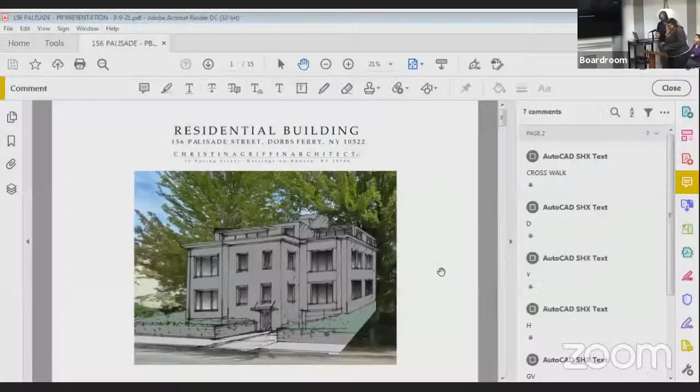I'm not able to share... let's see... you're welcome. Magic.

Good evening. Hi, I'm Christina Griffin. Can everyone hear me? Yes. Okay.

We submitted a new proposal. We've reduced the number of units to 4. This is a building that is 3-story, about 8,300 square feet. After our last meeting, we looked carefully at zoning regulations, and we have an as-built, as-of-right scheme to show you. We also have some schemes we want to go over with you because there are just some difficult situations that come up because of the grade that make it necessary for us to ask you to consider options that are just slightly different than the requirements.

We know we're following the new MDR2 zoning regulations that were recently adopted. This is a very quick sketch, and I'll say it's quick because we're still searching for the right solution for the building. It's just an image to show the 3-story building, access down below, and the 3rd floor setback. We'll go back to that in a minute.

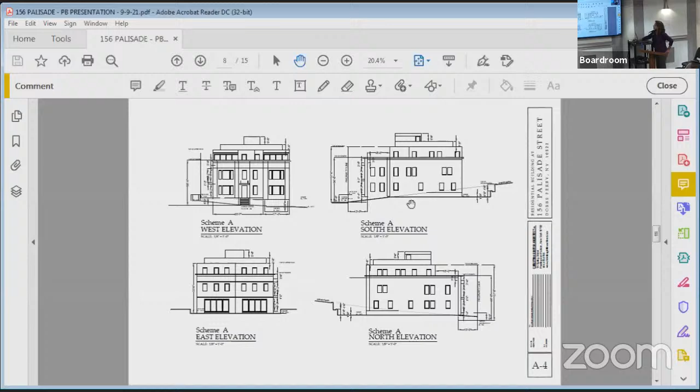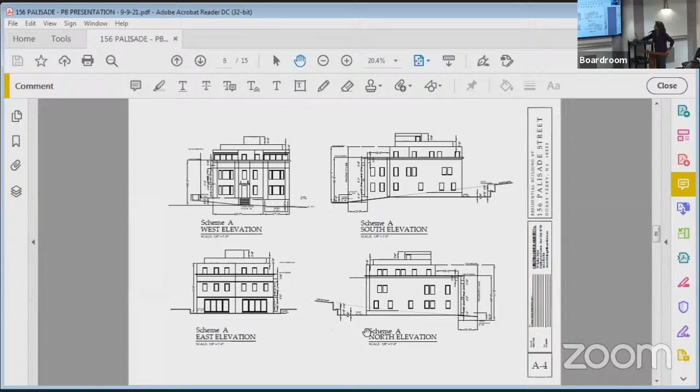And these are our elevations. Again, we're showing a very simple design right now. The west elevation has roof decks, outdoor space on top at the 3rd floor. The east elevation shows glass doors on the 1st floor, allowing access to backyards for those units. If you can see the dashed line on the north-south elevation, there's a part of the building tucked under the grade, and we'll have to wrap the back with a double retaining wall around the sides to get clearance for those windows.

Now we'd like to ask the board to consider a Scheme B. The reason is this is a very steep site - it goes up 15 feet. From the center line of the site at the sidewalk, the elevation is 109, and at the center line in the back of the property, it's 124, so there's a difference of 15 feet. We felt it was important to consider another plan where we wouldn't have so much excavation, which we know is not just expensive but causes a lot of disruption.

So Scheme B has a garage with 1 parking space per unit. Instead of 7, we have 4, so that we can keep the back wall of that garage aligned with the building above.

We know there's a parking lot across the street, so we're thinking that residents could use parking there to make up the difference for what they need.

This scheme also has the advantage that the driveway into the building won't be as steep. We had a 12% slope, but this is a much gentler slope. We also get handicap accessibility at this lower level. This section for Scheme B shows the dashed line of the grade, and the retaining wall is only 4.5 feet high.

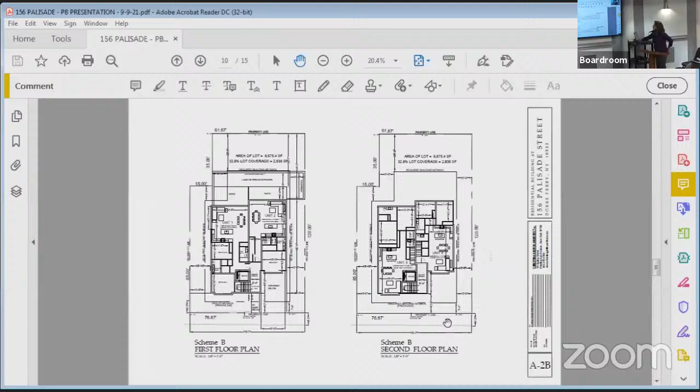So we wanted to ask the board if they would consider Scheme B. That 37-foot maximum height from the zoning regulation is measured from the center line of the sidewalk in front of the building, but because of the steep slope of this particular site, we feel it really has a negative impact on the building when you have to fit it into a steep grade like this.

So this scheme is actually 39.8 feet. It happens to be that number because that allows us the handicap access down below. That height is at the very top of the building, at the third floor, which is set back 15 feet from the front wall of the building. It actually jogs, so it varies—I'll show you that plan.

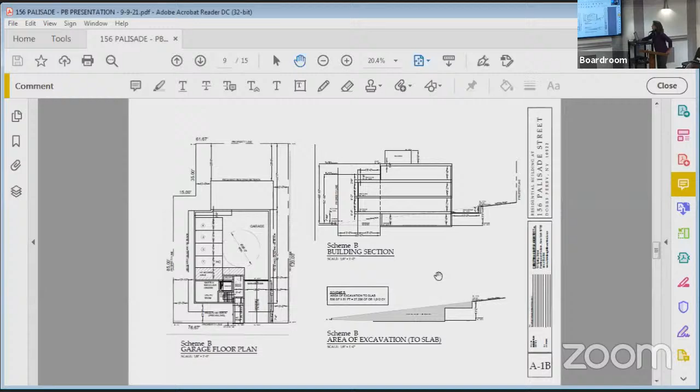Scheme B is exactly the same as Scheme A, really, except now we have handicap access to the lower basement level. We have the same layout, same lot coverage—it's just that the garage has only 4 units and 4 spaces.

Up at the third floor, the height of each of the floors goes up to that 39.8.

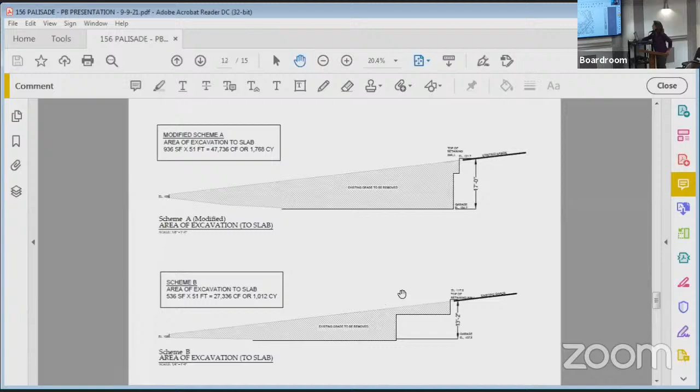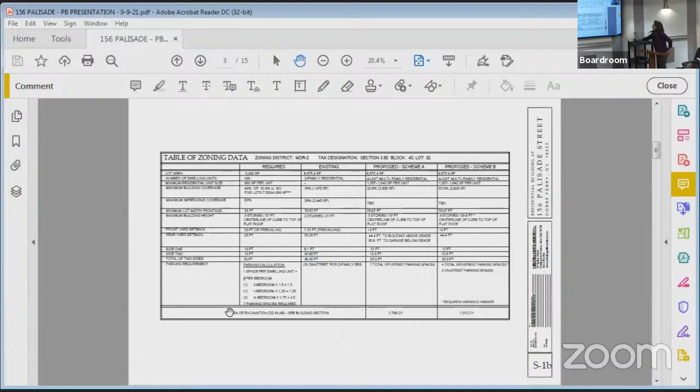Back to our 3D sketch—again, very rough, needs to be developed. This represents Scheme B, and that's all we have prepared for tonight. I did this in SketchUp, then added a hand-drawn overlay, so the SketchUp model is set so that the top of this third floor setback is 39.8, and the top of this wall in the front is 32.8.

Scheme A is lower than this. We have this at the front parapet at 30 feet and the back very top at 37 feet. So in most respects, the building meets the code except for the height on scheme B.

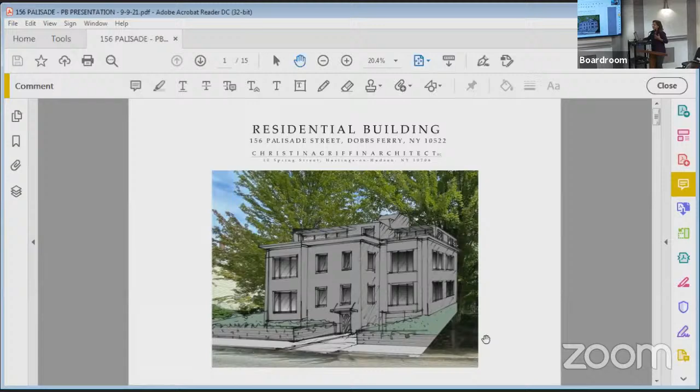So we would like to know your comments on both these schemes.

Christina, do you have the underlying discussion? The submission, the elevation, the street elevation is scheme A. Is there, have you tried putting the scheme B elevation into the overall streetscape? Not yet, because of vacations and everything, and the time between meetings, we couldn't get there. We would like to do that.

We might want to draw this in a different way because the main facade is 15 feet beyond the wall of the garage, and the third floor wouldn't be so strong. But we will need to put this on the streetscape so you can see that, and we're going to be doing that depending on your comments tonight.

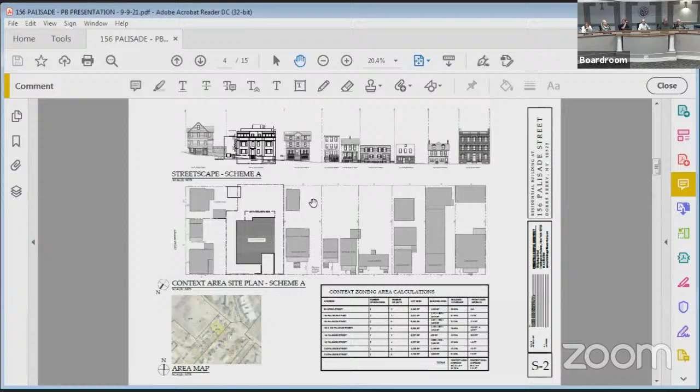In scheme B, you could theoretically bring in, in terms of the front setback, there's the requirement, and then there's this other thing you can do, which is average the other setbacks along there. In scheme A, you have to make room for the handicap ramp. In scheme B, to reduce some excavation, you could theoretically pull the building forward a little bit. We know that, and we just haven't had the time, and we'd like to see if we can do that as well to help reduce the excavation in the back.

I think this is a nice step forward, and we appreciate your hearing what the board has been saying and trying to get the building to fit more comfortably into the streetscape.

I agree, I really appreciate that you have a scheme that is compliant. After 20 meetings, it's probably wonderful, and I think it makes us look much more favorably on little tweaks that'll help out.

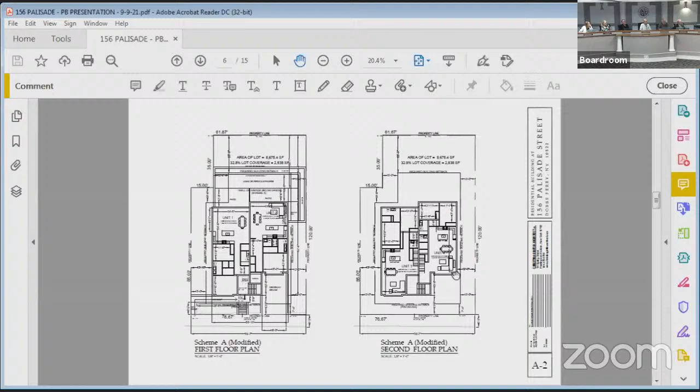Well, I think scheme B will not be compliant. Right, scheme A is compliant. Correct, scheme A is compliant. I mean, I think it's important. My first reaction, I was only looking at scheme A. My first reaction was, okay, we're there in terms of the overall direction of this thing, finally.

But I guess the board has to discuss scheme A versus scheme B in terms of the implications for parking, height of the building, and the excavation. So who wants to? It would require waivers for the parking, the height. Is that right, from A? If you go to B, there are two waivers that you're looking for.

For B, yes. I also want to point out, in Hastings, we had a maximum height for all buildings that went from the lowest point to the highest point, and we have so many buildings that look like they're submerged and they've had flooding problems. Finally, that code was changed, probably 10 years ago, but I've been in Hastings a long time. So sometimes when you have a steep slope and a maximum height at the lowest end, it forces you to push the building into the ground.

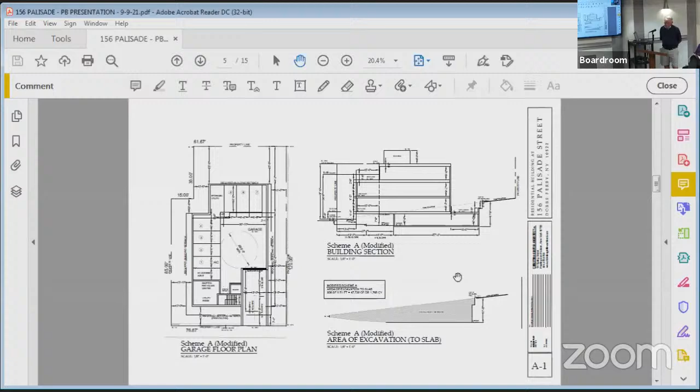Yeah, yeah, right? I feel like that's something that ought to be manageable, huh? Upstairs has that. No, yeah, I thought- thank you. I got it. Yeah, when I walked, at the beginning of this process, when I walked down Palisade and was just talking to people, they just were saying parking, parking, parking.

Understand. Anyone else? So I guess the village needs to build a parking lot there. Wow, right. Another parking lot - that's empty, good. I'm sure.

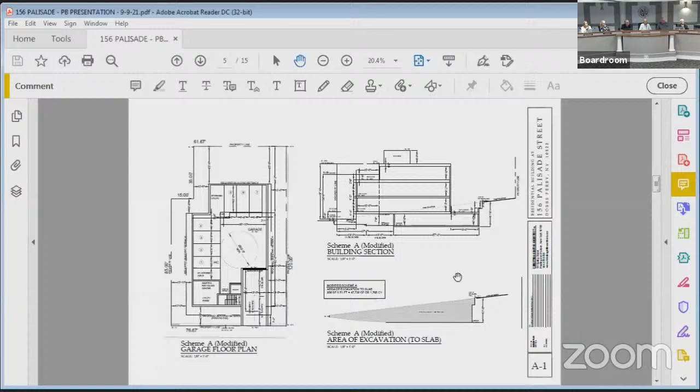If there's no other comments from the board, and the board is interested in going forward with scheme B, then I might suggest that the applicant provide more detailed engineering drawings, stormwater erosion sediment control, full site plans, and elevations for their next submission. Okay, so we're in lockstep on scheme B, we're proceeding. Any other questions from the board? Comments? Good. Well, thank you. Are you going to adjourn this to a date certain, or are you going to?

Are you going to adjourn the hearing tonight, or are you going to just take it off the agenda and have them resubmit and start from scratch? If you want to give them time, would you be able to make the submission deadline for the next meeting, or are you looking to be further down the road? Because if you can get an adjournment tonight, you won't have to renotice or start from scratch.

So what about an adjournment till the November meeting? The public hearing is adjourned till November. The public hearing remains open, and you'll get an engineer on board. So the public hearing would be adjourned to the November meeting. Yes, as long as you adjourn to a date certain, then you're fine. They wouldn't have to renotice if you adjourn it tonight. Can you give the date of the November meeting?

The November meeting would be November 4th, the first Thursday. It's up to the applicant. Yeah, it's up to the applicant if they want to destroy the lives of their consultants or not.

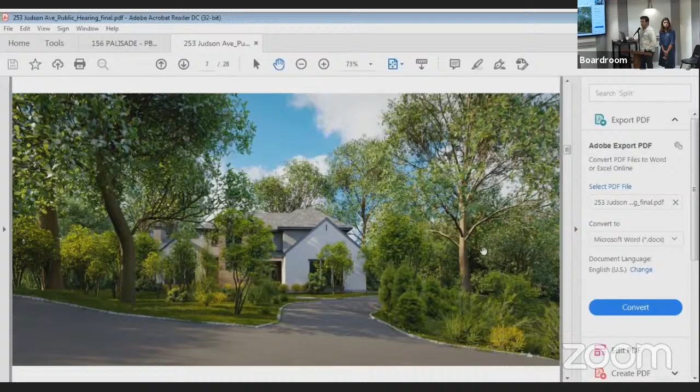We have the basement plan, the architectural elevations, front, rear, and both sides. We have the floor plan, that's the first floor plan with a 2-car garage. We have the media room, the studio, the courtyard, and the living room, dining room, kitchen and breakfast room, along with the mud room and powder room, which is adjacent to the garage.

The next one would be the second floor plan, which doesn't occupy as much space as the first floor plan because there's roof areas and different architectural elements which break up the facade, giving it more aesthetic appeal. We have a laundry room, shared bathroom, and then 3 bedrooms with an office. One of those, the rear one, would be the master bedroom with the master bath.

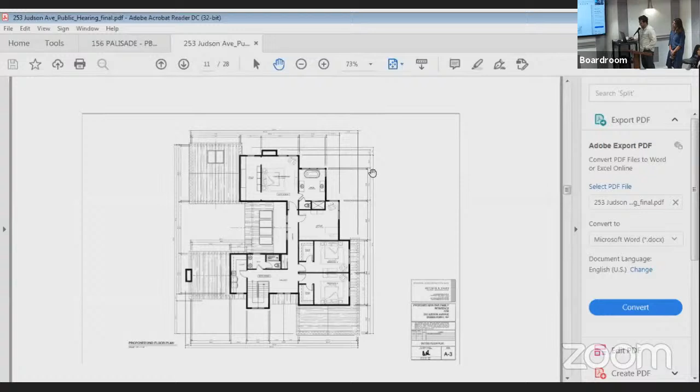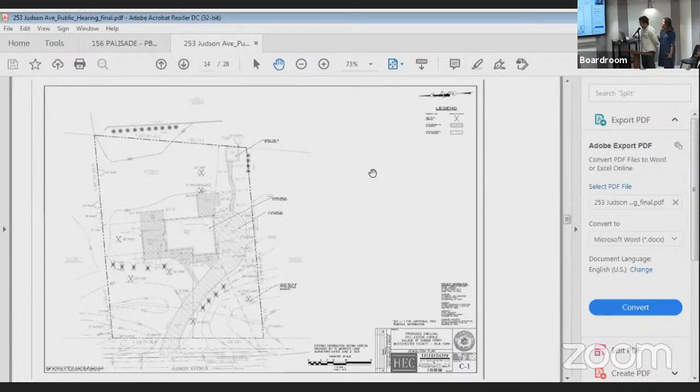So more or less, it's a pretty straightforward site plan. As far as engineering, all the comments from Mr. Oliveri were addressed. All the stormwater for the site is stored on site for up to the 100-year storm from all impervious areas. There's a small section of the driveway where it goes right out to the road - it's just due to elevations, it wasn't feasible to collect. But for the most part, everything is collected on site, stored on site, and will not be released. In the existing conditions, all the paved areas and the house were released to grade and added to the drainage problems of the village.

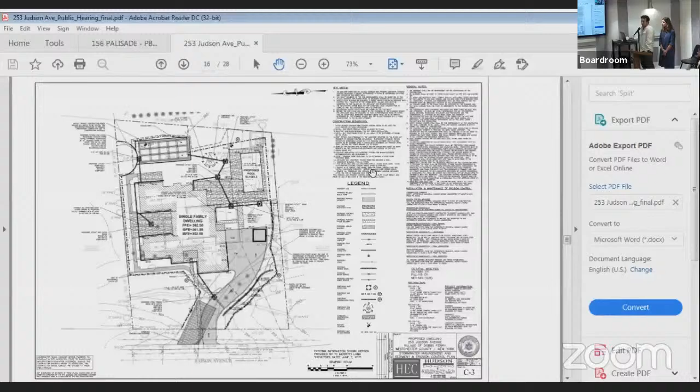Hi, I'm Susan Janesville of Aspect 120 Landscape Architecture. Talking through the landscape design, we really stuck to the area of disturbance and looked to replace a lot of the landscaping that would be taken away because of the disturbance, using all, if not exclusively native, then almost all native and non-invasive and appropriate for the climate. Also putting 2 large oak trees in the back of the house, recognizing that canopy trees are important, and putting them where it will not endanger the house in the long term, but will give shade to the site.

Yeah, there's a lot we could talk about in terms of landscape on the existing site. It's really, as Shamita just said, a lushly planted site - you could see the care that was given to the planting of the site's landscape. But that said, as you might know, the landscaping from the past 30 years isn't the same as the last 5 or 10 years. A lot of invasive species were planted, and only things that survived the deer remain. So there's a lot of improvement that can be done beyond what's being done right now, and that is definitely the next step. As I spoke to Michael and Shmita, they really do want to move forward and do really smart landscaping with native species, looking at things appropriate for the climate, deer tolerant as much as possible. Of course, nothing is deer proof, but looking forward, there's a lot that's going to be done beyond this. Thanks.

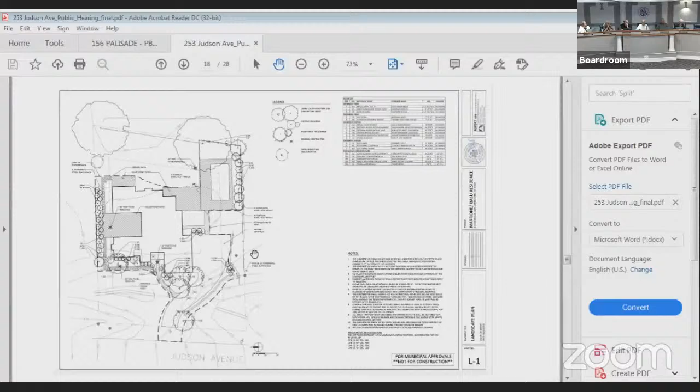Okay, thank you. If they have to chip, we could require that company to do a survey of the surrounding properties, existing conditions of their foundations, and then a closeout survey of conditions after it's completed. Okay, thank you. I imagine there'd be ways to work around the ledge too, incorporate it into the basement without destroying it.

Right, I'm just raising a concern. I know lots of people who have sort of integrated rock into their basement. As part of the building permit process too, construction sequencing and approvals for that kind of impact, construction impacts would all be taken into consideration. But as a resident of Judson Avenue, I can tell you we've had months of chipping going on in our neighborhood, so it's a valid concern.

Okay. Well, that's just that one, that's just the unfinished property at the corner. I mean, some of the other buildings have gone through the same process.

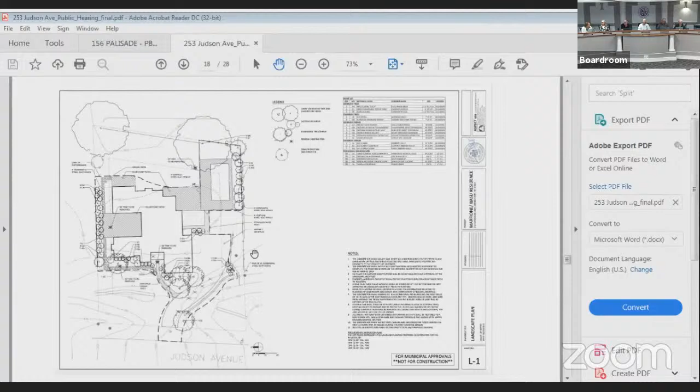And also, taking that into consideration and making it a condition that the impacts would need to be reviewed in terms of what kinds of vibrations and things would impact the nearby structures. And you've done that in the past. I know when 41 Cedar was here, you included particular conversations about the impact on the church. So there are ways to get around that, but you would benefit from providing instructions exactly what you need.

Next time, and then if there's no one else to speak, you can adjourn it to your October meeting. If they won't meet the submission deadline, you can take more comments and then adjourn it again. So you have that option. I think the key for us tonight is to plan a site visit.

I think we've heard from everybody, and I think it gets repetitive after a while, but I think it'd be very helpful. I think some of the people on the board live nearby. I've driven down there for years and know people that have lived on every side of you, so I know the area, but I think you look at it differently when you're looking at it for a purpose. Do we need to have an organized site meeting, or can we just go on our own? I think it might be helpful to go together if we could.

One thing I'd ask you to do, which we typically do, is have your surveyor stake out the major corners of the house on the property. You may find this a useful exercise for yourself, to stake out the major corners of the house and, based on the neighbor's comment, maybe where the pool is going to be sitting. That's usually helpful to actually visualize where the building is going to be.

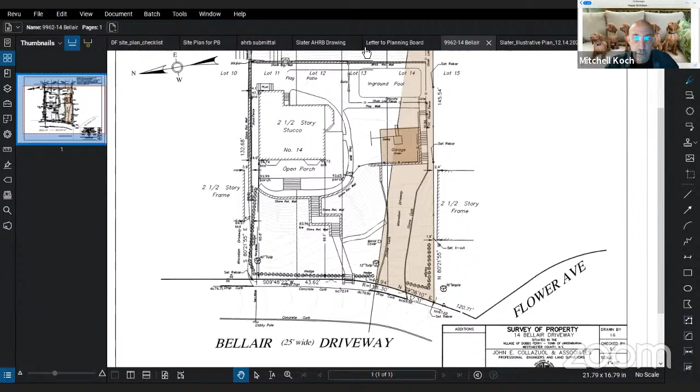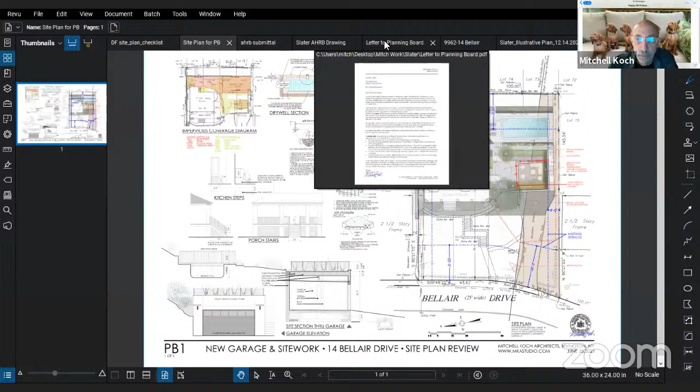And again, we don't have any impervious coverage issue—we're not adding to the impervious coverage, although what's already existing is somewhat in excess of what is allowed. So that's a concern, I think. And finally, we did go to the AHRB, who approved the project. And if Yair is still listening, he could pipe in if he wants to.

I could speak to this, Mr. Chairman, if you like. Sure. So as Mitch said, this was confusing because a portion of it is in Hastings. As he said, it's true, he's adding only 10 square feet of impervious surface. We require stormwater retention at additions of 100 square feet, but because the property coverage was already over—not so much in Dobbs as it is in Hastings, who doesn't want him to do anything—the applicant has graciously offered to voluntarily put in some stormwater retention, which I thought solved any confusion and was a good compromise.

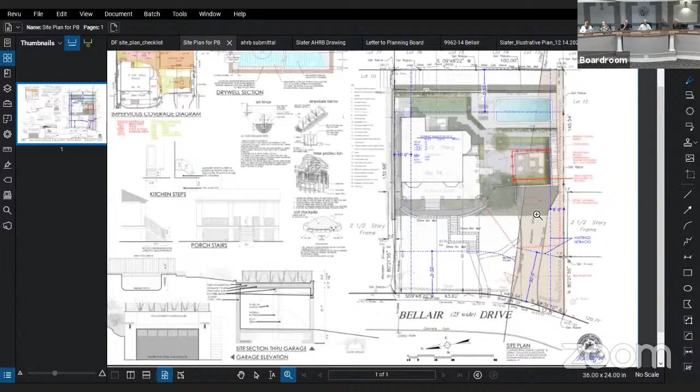Is the garage being replaced with a new structure? That's correct, same footprint basically. Well, this doesn't seem like it has a large impact. Master of understatement, Alan Hale. It'll be better because now they're retaining water.

So what's our next step, with the goal of streamlining this? Well, we can... ignore it, it'll go away. Could we set a public hearing for next month with a resolution ready to go? Yes, I think we do a public hearing and go. Both myself and Anthony submitted comments back on August 2nd to the applicant, and it would be helpful if the applicant would respond to those comments before the next meeting as well.

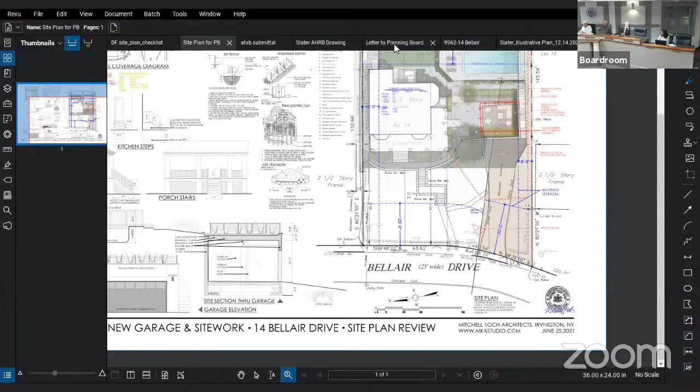Okay, yeah. On August 2nd, I responded on the 6th. I don't know if this covers it, but the zoning table I submitted—that actually... again, the weird thing about the impervious coverage is that most of it is not actually on the Dobbs Ferry side.

So I'm not really sure how to parse that, because these calculations are for the entire site, not just the portion of the site that's in Dobbs Ferry. But if you direct me to do that, I can work it out that way too. I'm just a little bit confused, honestly. I think there's both, and there's two memos, and I did not receive that memo. I'll follow up with the building department and take a look at it.

I believe if Ed is satisfied with what you submitted for the zoning table, that'll be fine. But there's really just a few other additional comments that need to be addressed. I'll make it my business to get on that right away if I haven't done it already.

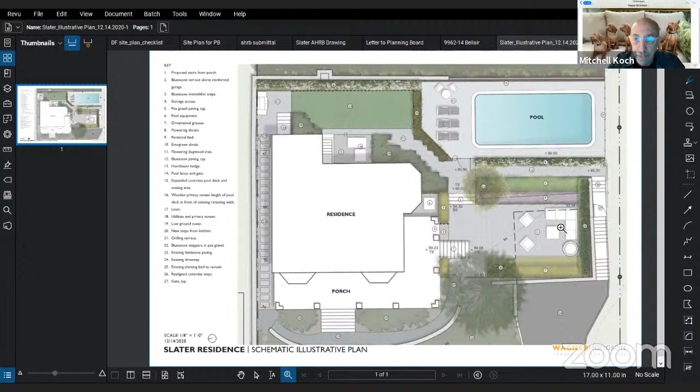Yes, I do have one final question with regard to the submittal for the public hearing. My clients have asked that this list of plantings that the landscape architect has provided be held in abeyance until the next phase of the project. You can see they've specified some specimen trees and some shrubbery, but at this time, the goal would be to just plant grasses and wait until they can get their heads, and their wallets, around a more extensive and comprehensive planting plan.

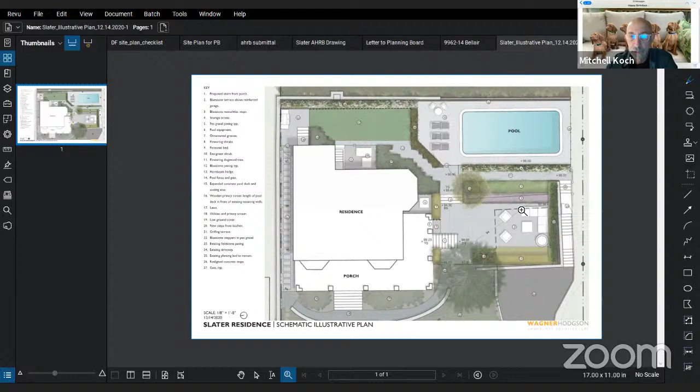So I don't know whether that's allowed, or if this has to be done in tandem with the actual construction work. Obviously we'll plant to mitigate runoff, but most of the plantings are like little flower beds. Can they just put in lawn and submit a simpler plan? I think the way forward is to submit a simpler landscape plan and we'll take a look at that.

Okay, let me see if I can pull that together, or get the landscape architect to do so by our submission deadline. That would be great. If in fact I cannot get that in time for the October hearing, can we be pushed back to the December hearing? Is there one every month? I think that may work. Yeah, okay, I think that's actually perfect. But I would like to see if I can get this happening right away.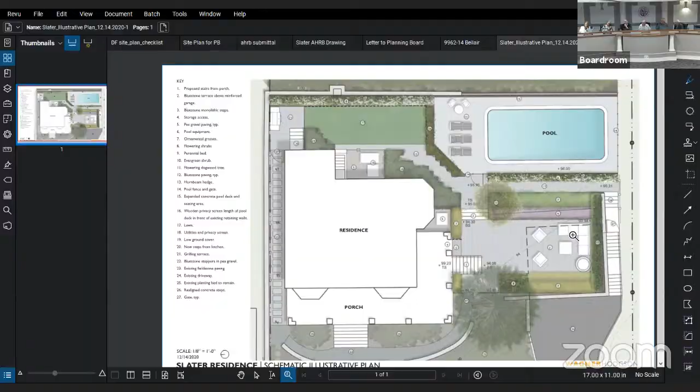Okay, so do we call for a public hearing? Is that our next step? Set a date, let's do it. And he would need to do the neighbor notifications. It's been done already. Oh, that's right, they do them initially. That's great.

I move we call for a public hearing. Second. All in favor? Aye. That would be at the, let me get it right, October 7th meeting date.

Okay, good, thank you. Good night, people. Good night. Good night, Rich, wake up those dogs, they look a little stiff.

All right, item number 9 on the agenda, 7 Fairlawn Avenue. Pre-submission conference for proposed exterior additions to existing home. I think that was the last thing on the agenda. No, and then we got a vacant lot.

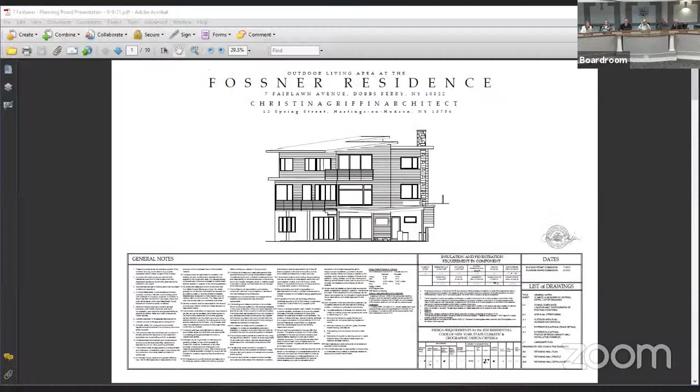We have a Zoomer. Christina and Suzanne are coming on from Christina Griffin Architects. Oh, she was just here. I think she knew the meeting was going to be long, so she decided to go. There she is. You look familiar. Hi, Christina. Hi, how are you? I'm back. Suzanne's here with me.

I'm the architect, she's the project architect, and we're going to take you through drawings for a new outdoor living area for 7 Fairlawn Avenue. Suzanne's going to put up the drawings. Can you see them? I thought I had them up. No? It's not showing. Oh, I'll try again, it was only showing partial. Yeah, perfect, there you go.

Okay, now we were the original architects for this house, and we were delighted to be asked to come back to design an outdoor space at the side of the house. The purpose is to give them a shaded area, which they don't have at the moment. There's a lot of intense heat back there, so to provide a shaded outdoor living space that consists of a porch that has under it a sitting area, an outdoor kitchen, and a dining area, a plunge pool, and a patio.

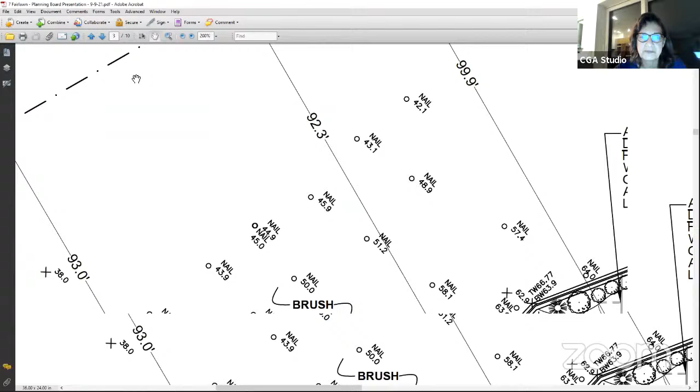We are also, most importantly, replacing a retaining wall. There's a series of retaining walls that have failed along the street, and we're going to put up a new retaining wall, but we're actually covering those retaining walls with a plant bed that will have erosion control plants, like different types of ground cover.

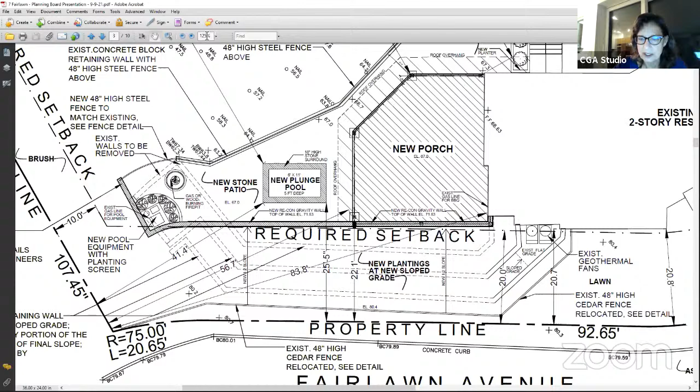Ground cover, juniper, will go on that slope grade. We're working very closely with an engineer, Alex from Sessi Engineering, who should be with us tonight, to make sure that the new retaining wall and any new structure is going to be structurally sound.

This new porch and patio has been designed so that the supports are within the limits of having structural members that will not have any negative impact on the existing retaining wall. If you can see my cursor here, this angular shape is a low retaining wall at the edge of this level area on the back of the house.

Between that retaining wall and our proposed retaining wall, we're planning to put a new porch and a new patio with a very small 8 by 11 foot plunge pool. If you know this site, the whole area from this angular shaped retaining wall down is all a steep slope area.

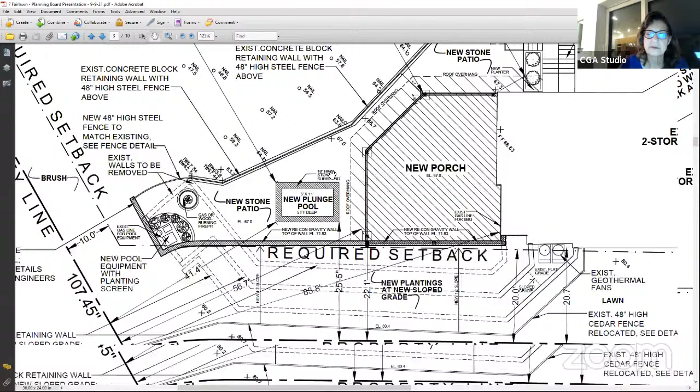If you look carefully at the site plan, you can see the dash lines of the existing retaining walls that have failed along Fairlawn Avenue, and we're planning to bury them. These dash lines are the existing walls that we're planning to demolish, or just bury them under a slope grade.

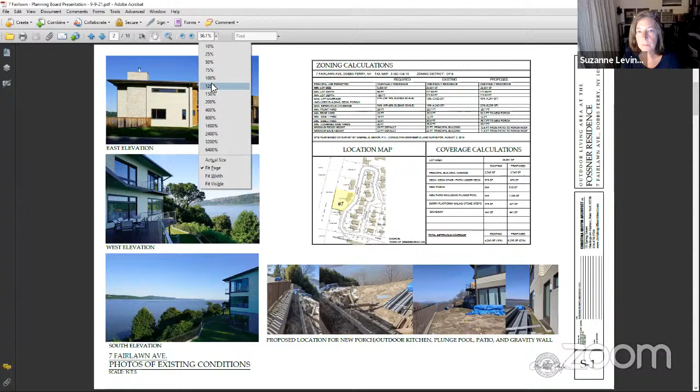Was this the property that came to us with a failed retaining wall previously? Yeah, the collapsed one. Yes, you can see the wall here. We have some photos of that wall. Yeah, that's the wall we know.

So Christina, are you addressing that wall, or are you addressing the wall on the train track side, the downhill side? This wall along Fairlawn.

Dan and Beth Fossner hired Sessi Engineering, and they came up with a plan to demolish the walls. They're already fallen down, but the idea is to bury them under a slope grade. Dan Fossner is actually on the Zoom with us if you'd like to know the history behind that.

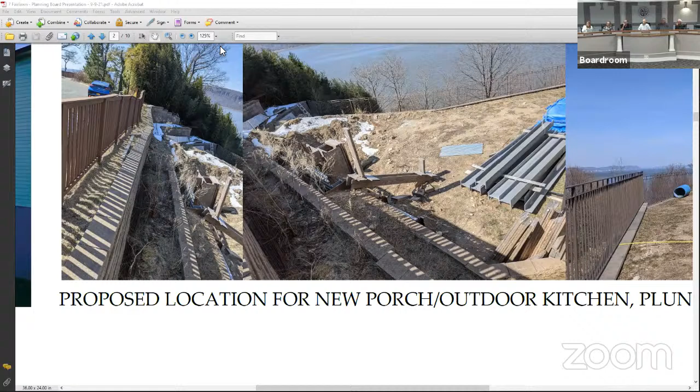Does the slope grade need to be reinforced in some way? We invited Alex here to join us, the engineer, so he can answer those kinds of questions. The idea is to give that street the support it needs, to replace the wall with a new retaining wall and a slope grade going down to it.

Alex, can you hear us? Can you hear me? Gotcha, yes. As I joined as a panelist, my screen went out for a minute, so I may have missed the last sentence or two. If there was a question addressed to me, can you please ask it again? I think Rob Lane pointed it out for me.

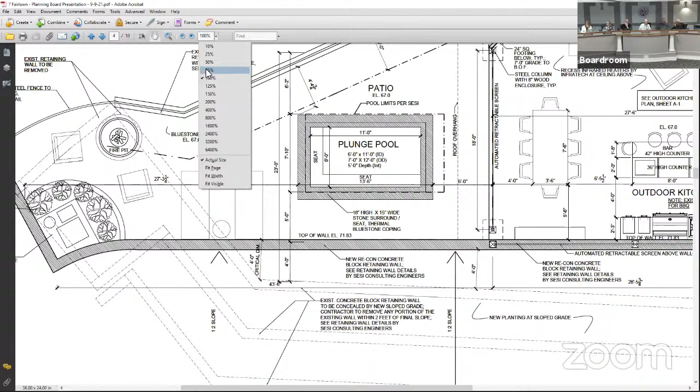The failed wall will be put into a slope, but there's a new retaining wall at the bottom of where the failed walls were. That's correct. And that's going to be holding everything up. That's correct, okay, hopefully.

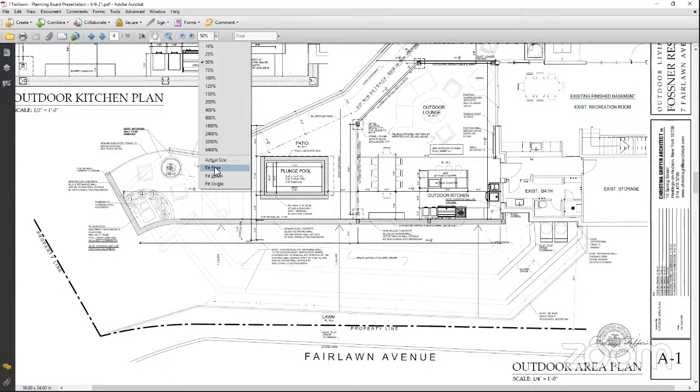How high is this elevation of the slope? The lower retaining wall at the base of that slope is a 5-foot wall. From the top of that wall, it slopes up to Fairlawn Ave. So the total height from Fairlawn Ave down to the lower yard is on the order of 15 to 18 feet. I can get an exact number. So the slope itself is about 10 to 12 feet. Yes, you can see it here.

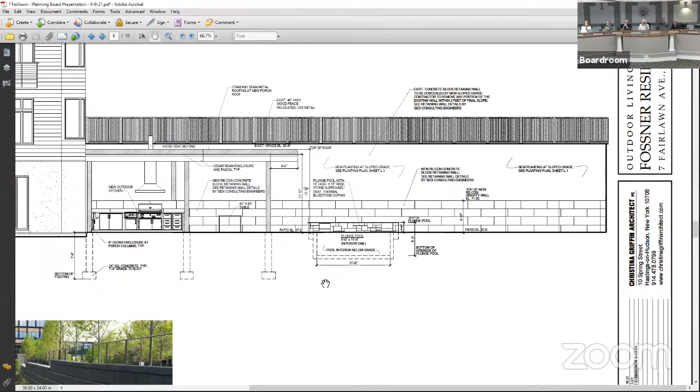We also submitted the structural drawings, if you'd like to see the details of that wall. That's the engineer's specialty. Alex, what sheet would you like?

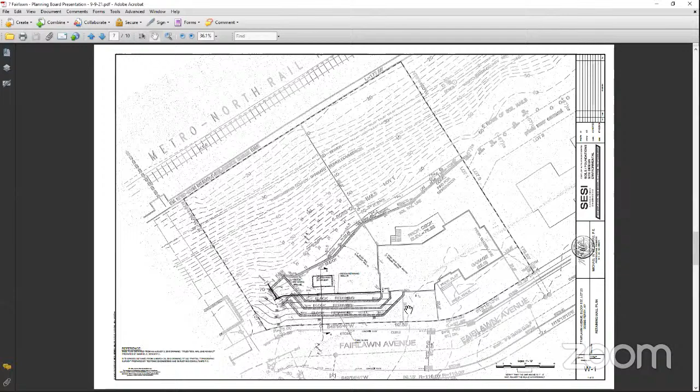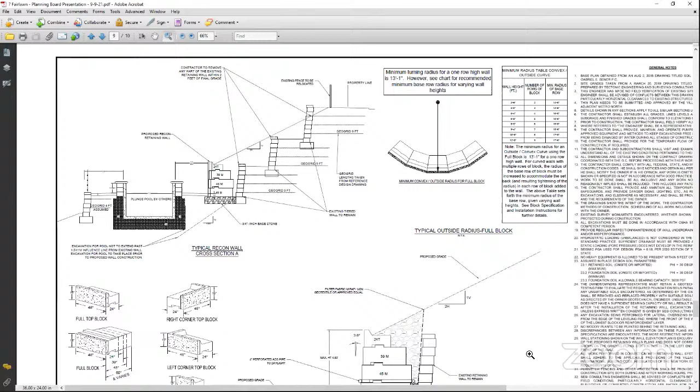So that goes along the whole backyard. Let's go over to W2. I'm sorry, where do you want? Page W2, the page before.

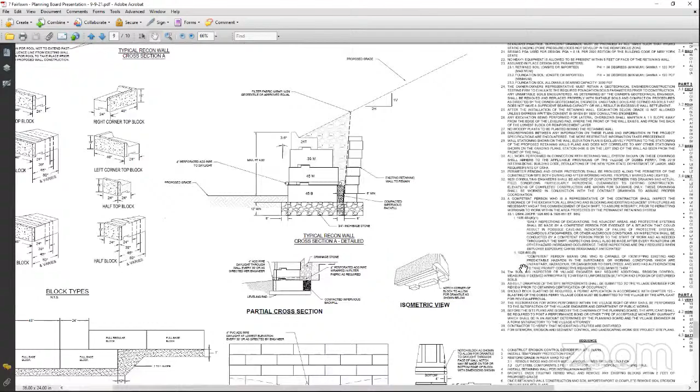Oops, sorry, well, we'll see him next month. There you go, there we go.

So this runs from the corner of the house, which is on the left there, station 0, and runs to the right all the way so that the entirety of the three-tier walls would be covered by this new slope. And then in order to close out the grades to the property on the right on this plan, which is south, a second leg of the wall comes out to close the grades on the south side of the lot.

I'm just curious, the old block wall, did it have any ties back into the hillside going up to Fairlawn? Were there anything tying the blocks back into the hillside? Yes, you could see GeoGrid exposed through the face of the block.

If I recall, the work being done on the site is largely what caused the failure of the wall. So now in replacing it, you would normally excavate and slope out, but you cannot do that because the roadway is there. So this solution allows us not to have to excavate into Fairlawn Ave.

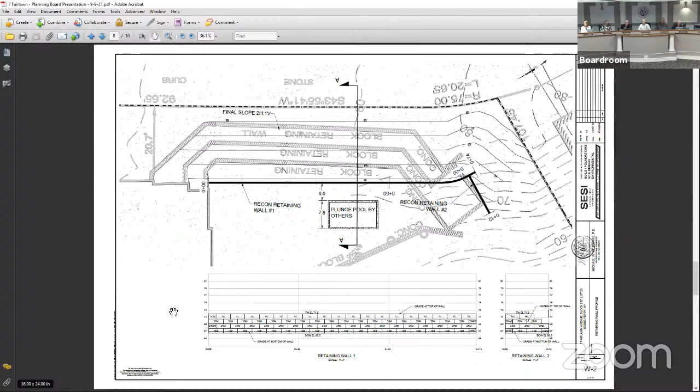Wow, okay, okay. So, back to the porch.

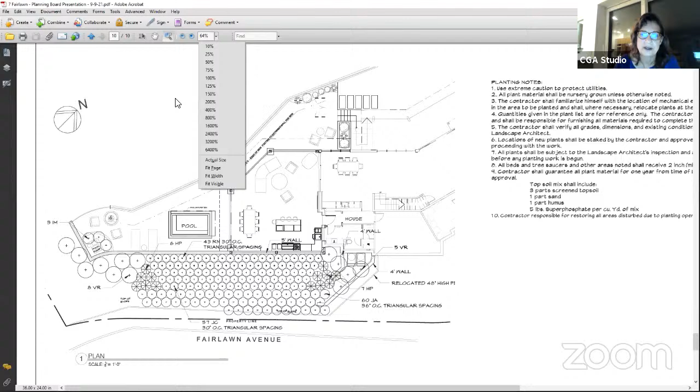So if you see our site plan, we also have a landscape architect, and we have a layout for all the types of plants that we're planning to put on that slope grade. And back to the blow-up: here's a blow-up of the plan showing that this porch is a roof with columns, and it meets all the setback requirements, and we're under the lot coverage and impervious coverage for the site.

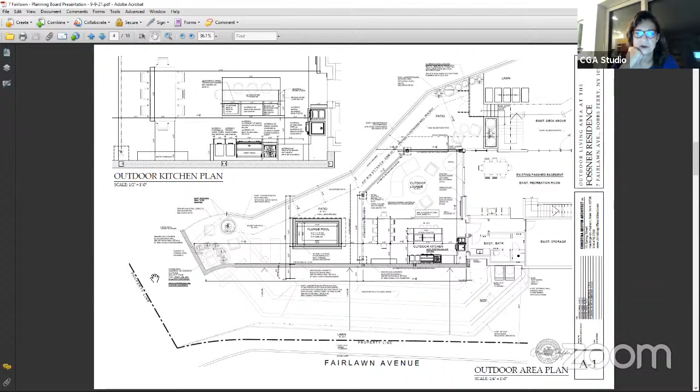And I guess we'd like to know what our next step is for this, for the review process. Where are we with the engineering reviews? I would think that would be a pretty important part of this.

Yeah, so this was just submitted. Both myself and Anthony issued memos this past week. So next month we would anticipate the applicant providing responses. If the board is interested in opening up a public hearing next month, we can do so.

We think we're going to be ready. Did we receive those memos? I don't think we received those memos. Okay, we'll follow up with you on that. Okay, thank you, no, we have not received any memos for this project.

So it sounds like we maybe need to have another pre-submission, it sounds like, until we get those resolved. Yeah.

Are the memos substantial enough that they'll need to make changes? There's some additional information needed, like an erosion sediment control plan, stormwater plan. So yes, I would say they're substantial enough that there should be a resubmission from the applicant.

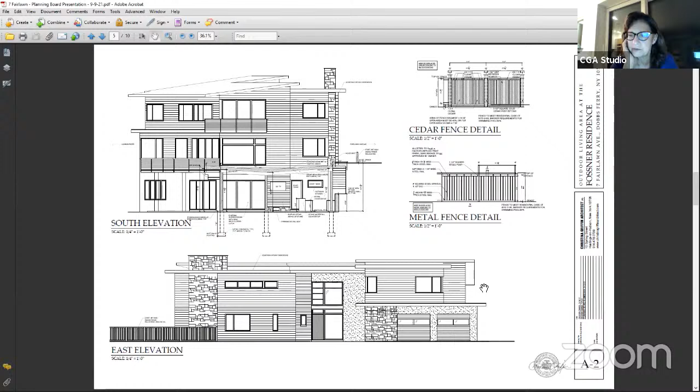Okay, yeah, I think we have a preliminary layout from Hudson Engineering, and they will be providing more details for the stormwater system, erosion control details. If I can jump in here.

If you can go over to the photos of the existing wall that you have. Yeah, right there at the bottom. So right now the walls are in a state that the wall is undermined.

We're going into yet another season of winter months with this wall, and keeping in mind that the state of the wall is undermined, conditions such as snow, rain, freeze, and thaw can cause this wall to move further. I don't know if, with what was just brought up about another planning submission before an open hearing, there's any way to arrange this so that it could be done sooner rather than later.

I think you have a condition that we want to get repaired as soon as possible. Ed, correct me if I'm wrong, but if there's health or safety issues, Dan, they can address that immediately, correct?

Yeah, so this is supporting our village road. So my suggestion would be to set the public hearing, and hopefully they can respond to the engineering issues before next month. If they do, we can get a resolution going and approve this and get it moving. If not, if there's still issues, we can still continue the public hearing, but we should set it now.

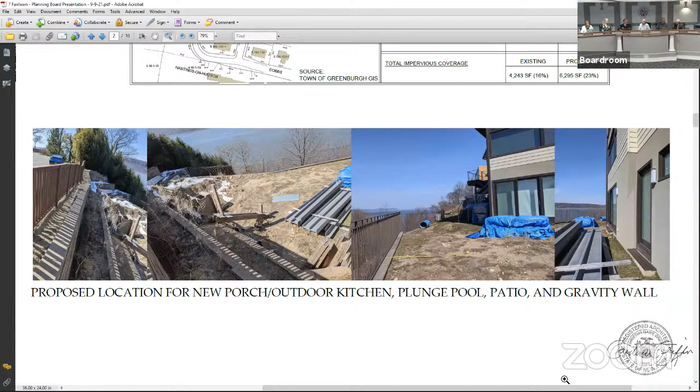Are these memos, the backup for these memos, yeah, they're attached to the agenda, so they're available online. I'm reading one right now. That one's from Nelson Pope.

While you're looking at that, are there any other issues, non-engineering issues, that we feel need to be looked at in more detail regarding this?

It's all compliant. Well, let's see, yeah, we have the engineer's memo. We can send that over to you electronically right away.

You can ask for a motion to set the public hearing on October 7th. So the motion is that we set a public hearing for the next meeting, October 7th. Second?

Does the planning board ever have emergency sessions? No, we'd have to be noticed. I don't know how emergency you can get. Well, a special meeting can be called. There are much reduced requirements if it's an emergency situation, so yes, you can conduct a special meeting.